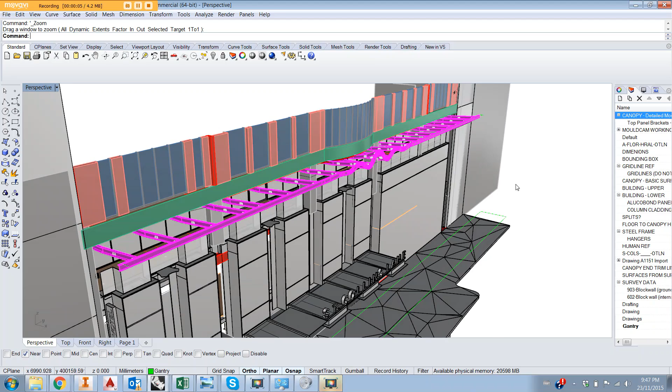Hi there. So as I mentioned over the phone, we'd like you guys to do another little job for us out at the St Collins Lane project. We're close to installing our panels now, but we need to attach some brackets to the primary steel frame before we arrive on site with our panels.

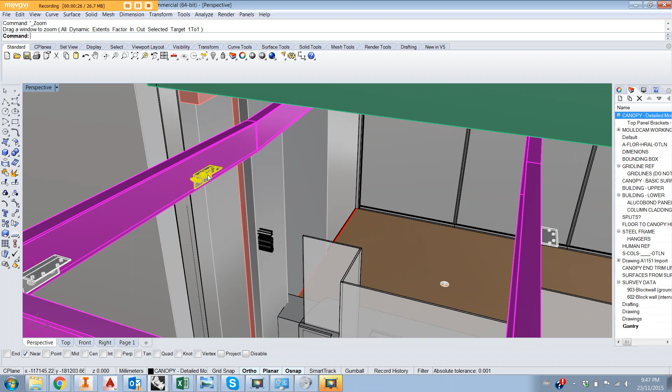So basically most of them look like this. It's just a steel angle component. And I have spoken to our install team about how they'd like to arrange this, and I think I'll put you guys in touch so that you can arrange to maybe go out to site at the same time so you can make sure that everyone gets the information they need.

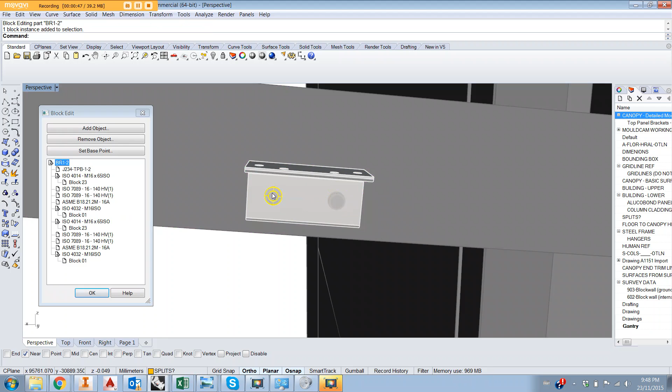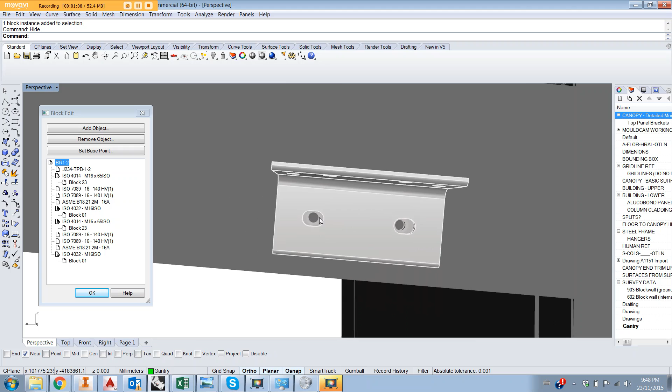But basically what I imagine you'll be doing, and what makes most sense to me, is we'll probably get you to mark the centres of these holes. So there's 2 holes per bracket, and you'll note the bracket itself has some slotted holes for adjustment, but if you can mark the centres of these, then that will give the guys the correct RL and in-out location,

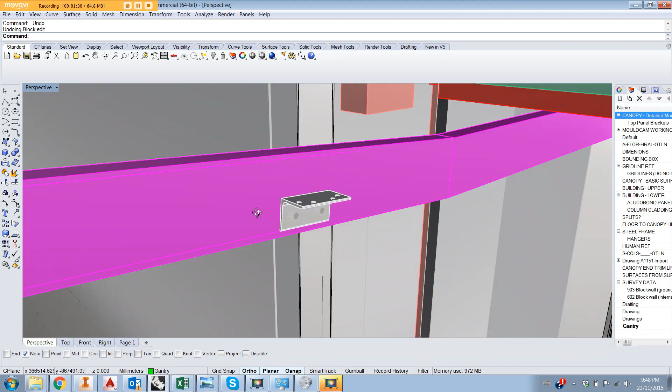and also the angle, because you'll note that these brackets aren't horizontal to the ground plane, they're on a slight angle there to match the angle of the beam. So I'll just go out of that. The other thing to note is that in and out from the beam itself, I've left a 10mm gap for tolerance, so if you could take note of that, and the guys will pack it to suit, or this gap will close up if it needs to.

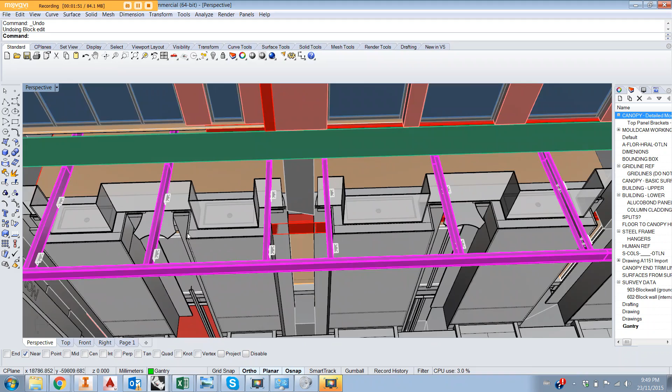So there are 2 brackets for each beam going all the way along, apart from 2 beams in the middle here where they're so close together that we didn't need any. The only other thing I'll note is that you'll see there's 1 beam where the orientation is reversed. That's meant to be the case, so that's fine. These ones will just face the opposite way.

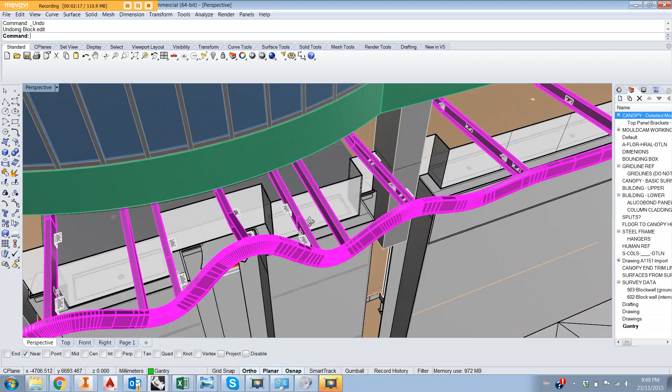The only other brackets that we'd like you to mark out are these ones here, which go on the inside of the PFCs. Now there's only 8 of these, so there's not too many. But same again, I imagine we'll probably get you to mark out the bolt hole locations.

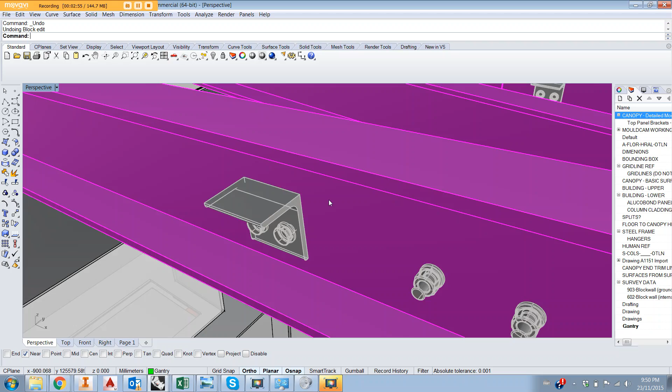However, these ones aren't actually so critical in terms of their in and out position to the beam. You'll notice that I haven't actually left any 10mm gap there. That's because there should be enough tolerance in our bracket itself that's attached to our panel, that these can just bolt wherever they need to on the beam. So that's pretty much it.

I'll be in touch sometime tomorrow, and as I mentioned, I'll probably put you in touch with our install guys. It's a company called Skylift down in Melbourne, and you can hopefully arrange a time to go out on site this week or early next week to mark these out for us.